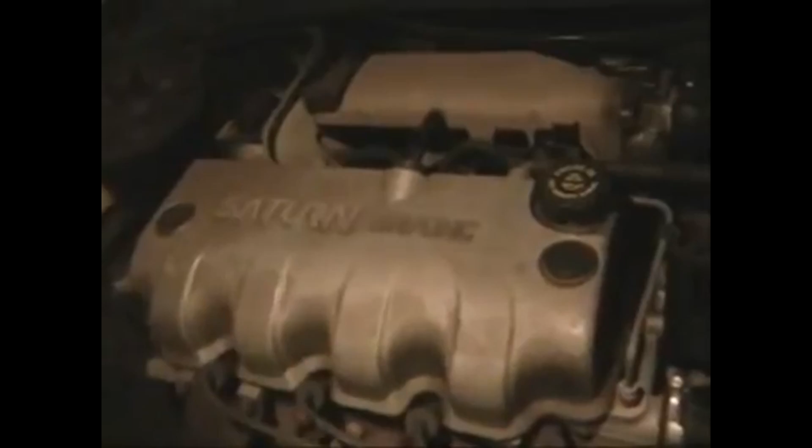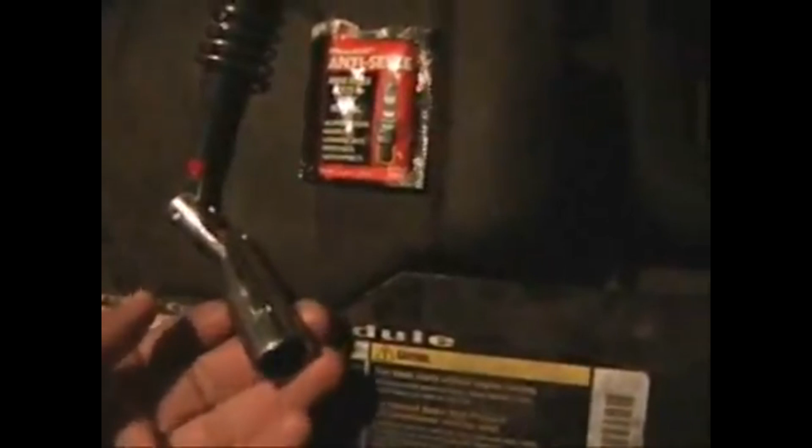Alright, today we're going to change the spark plugs on a 1998 Saturn single overhead cam. The tools you're going to need for this job are a spark plug wrench, which has the 5/8 size socket with the rubber boot inside to get hold of the spark plug as it's loosened, some anti-seize for the threads on the spark plugs, and your 4 spark plugs.

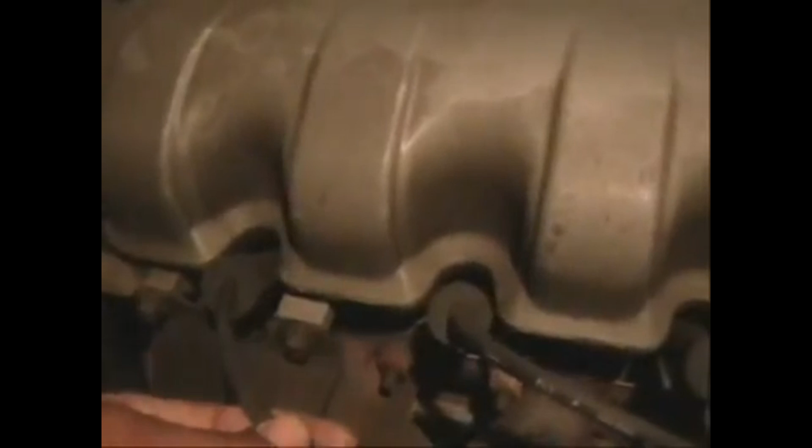Now all the spark plugs are located at the end of these boots right here: 1, 2, 3, 4. To take these boots off, just grab it right here at the end. Make sure you grab it right there, not right here, because if you pull on this part, it can rip out and damage the whole plug wire, and you have to replace that. I don't think you can buy those individually, you have to buy them as a set. So make sure you get it at the end and just turn and pull. It should come out really easy. Just move that aside.

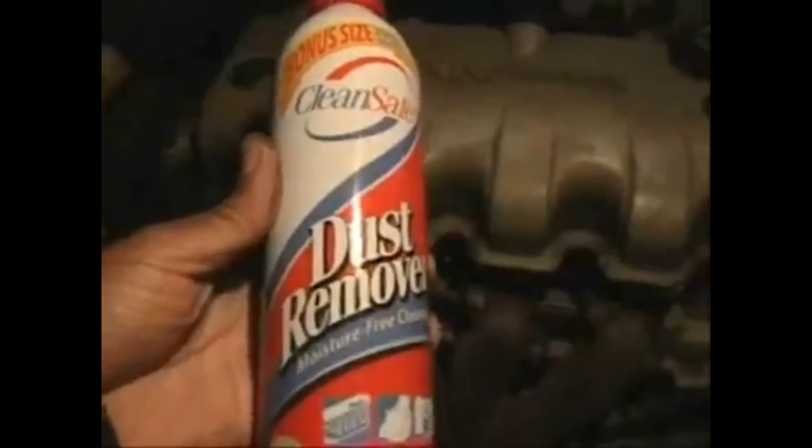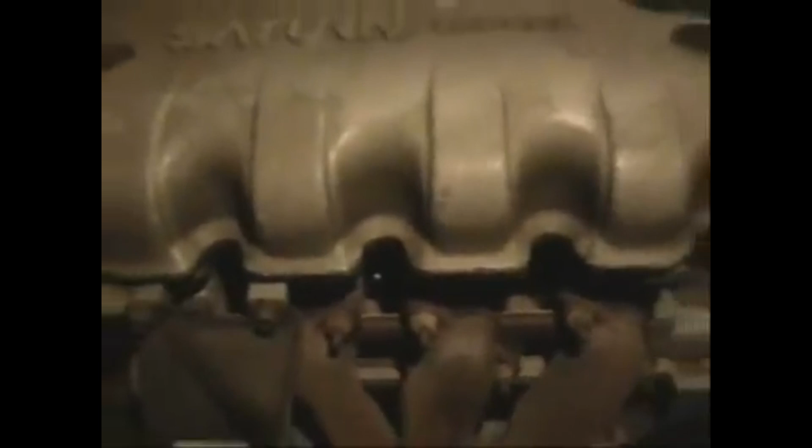Alright, now after you get the boots off, what I like to do is get some dust remover, any kind of compressed air, usually for computers and stuff. Sometimes, depending on how long the job is that you've taken the spark plugs out, there can be some debris down there. I'm sorry the lighting's so bad, but I checked these earlier before I bought the car, and there was some debris down there, so I use the compressed air before I take the spark plug out and shoot all the debris out, so when the spark plug is out, none of the debris gets into the engine and potentially causes some damage.

So that's what I'm going to do right now. Now before you do this, you may want to do one of 3 things: just close your eyes, or turn your head, or get some goggles on, because you don't want any of the debris to basically backfire and get any in your eye, if there's any in there in the first place.

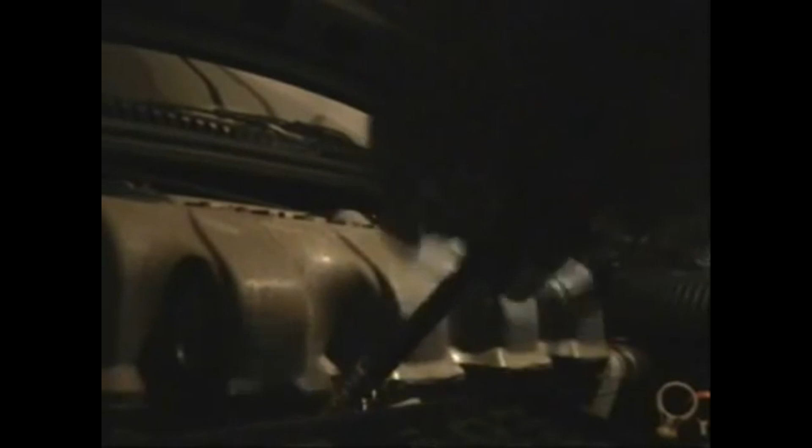That should be pretty good. Now that the dusting's all done, you just get the spark plug wrench and put it in there around the spark plug, and just twist away so it comes out. As I said earlier, the rubber boot should catch the spark plug, so you don't have to worry about it falling anywhere. Like this, see, it won't come out.

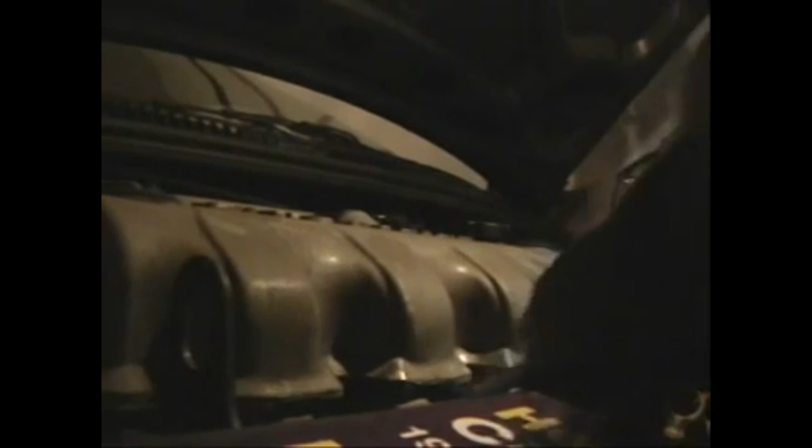And then you just pull them all out, and inspect them for any damage or signs of oil leaks, broken head gaskets, stuff like that, water, oil, white powder. We'll get into that later to show you what the difference is and what to look out for. But for now, we're just going to take these all out so we can replace them with the new ones.

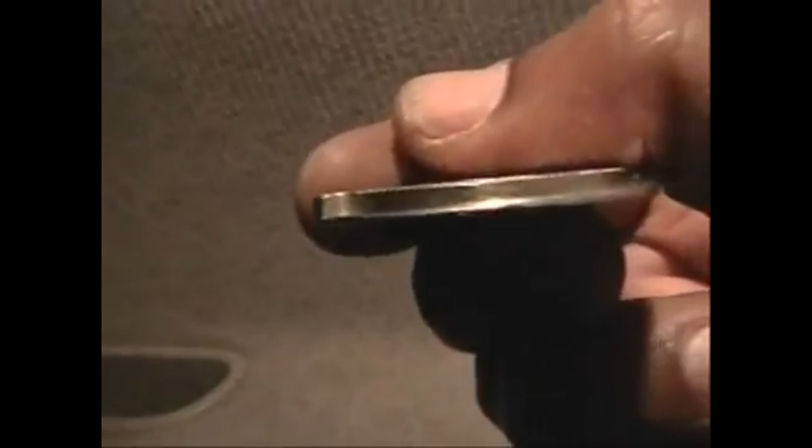Alright, now we have to gap our spark plugs. I came into the car and brought my light so we have better seeing ability. I got this gap tool, very basic gap tool from AutoZone, obviously, it says AutoZone on it. These numbers in here represent the space between the electrode and the tip of the spark plug. The bigger the number, the bigger the gap. As you can see here, the space right there, the metal piece gets bigger and bigger and bigger as I turn it.

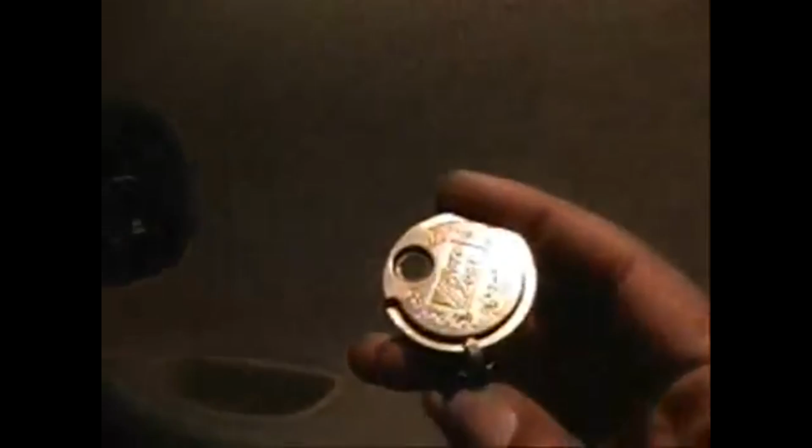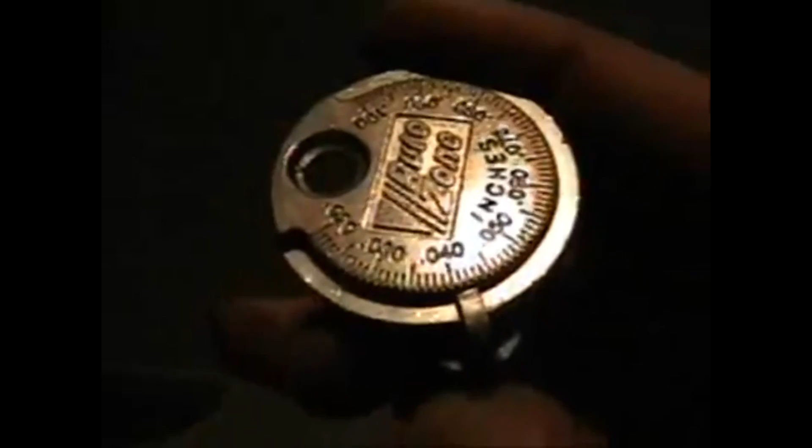All we got to do now is just put this little part right here, piece of metal, the brim, into the middle of that gap in the spark plug and see where we measure. Well, the guy at AutoZone said that these spark plugs are supposed to be at 0.040. As you can see, the spark plugs that I have are a little bit past that. From what I hear, it's okay to be a little bit past or a little under, but I like to be direct, I'm just OCD like that, I guess.

So basically, if it is too big, like how it is here, you just take the top of the electrode and you smash it down with, obviously, a harder object. Just put a little bit of weight on it, and that pushes that down closer, or take the tip of the spark plug and push it closer down to the electrode.

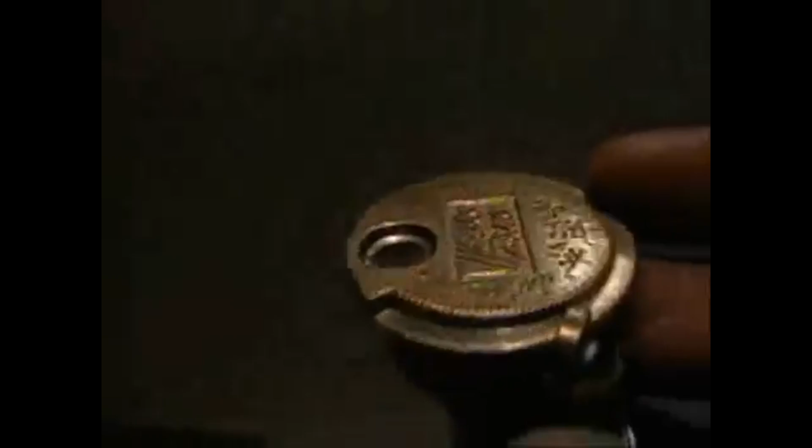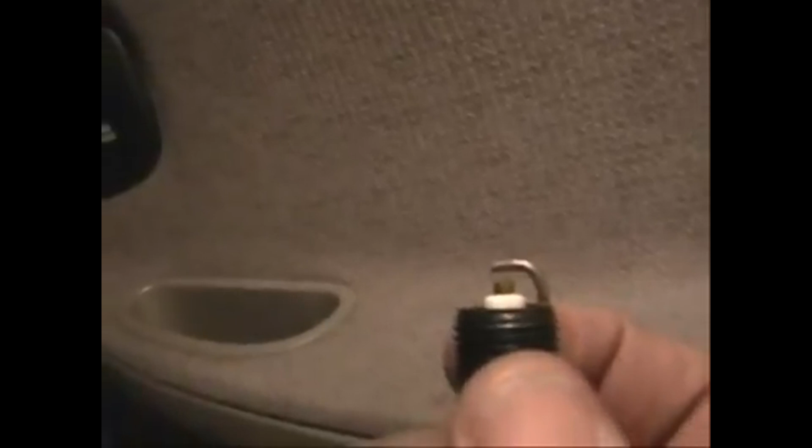Now, if it were smaller, let's say at 0.035, you would put the gapping tool in the middle of this. I just dropped it, but how it was before, and pull up, which will pull the end of the spark plug away from the electrode and create a bigger gap. Then from there you just keep measuring, plus or minus-ing, until you get to the designated gapping space for your engine.

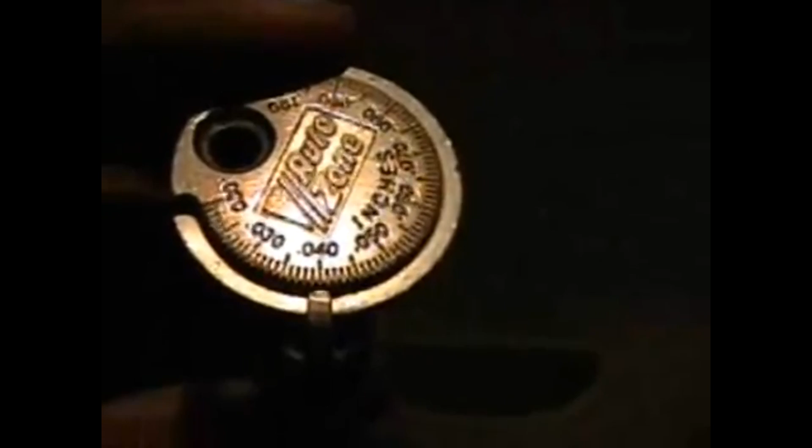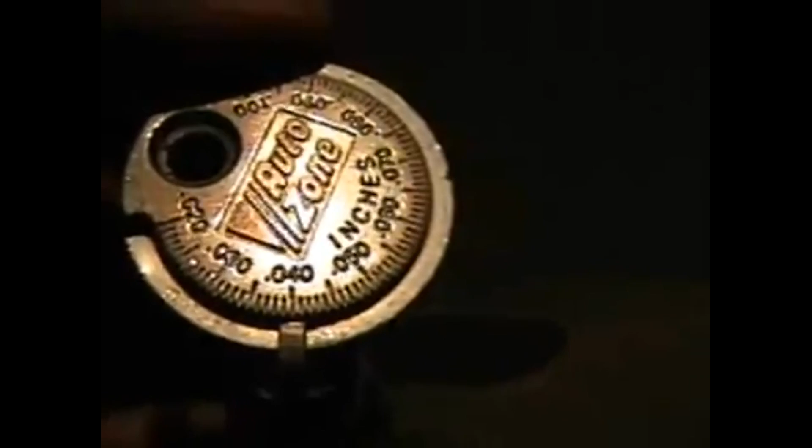Alright, so now I just re-gapped the spark plug. Now it's directly in the middle, right at 0.040, and I got to do that to the rest of the spark plugs. So from there, after I'm done with that, I'll show you how to put on the anti-seize onto the threading of the spark plug, and then we'll reinstall.

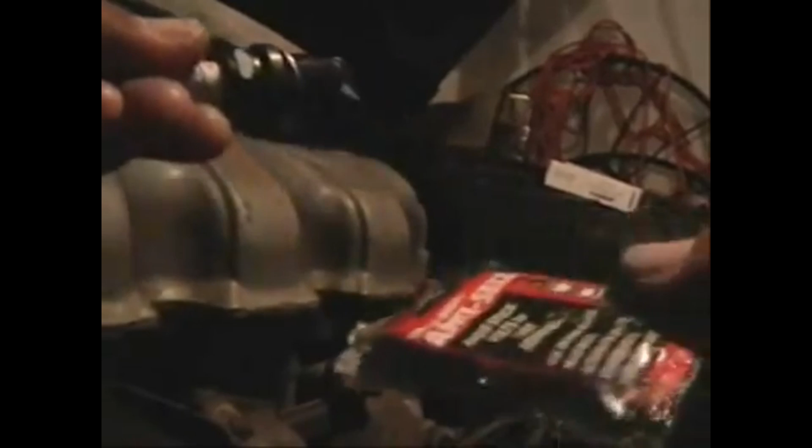Alright, now that we're done gapping, we take the spark plug and get the anti-seize. I like to snip it right at the edge right here, make a little snip, and squeeze until a little bit comes out.

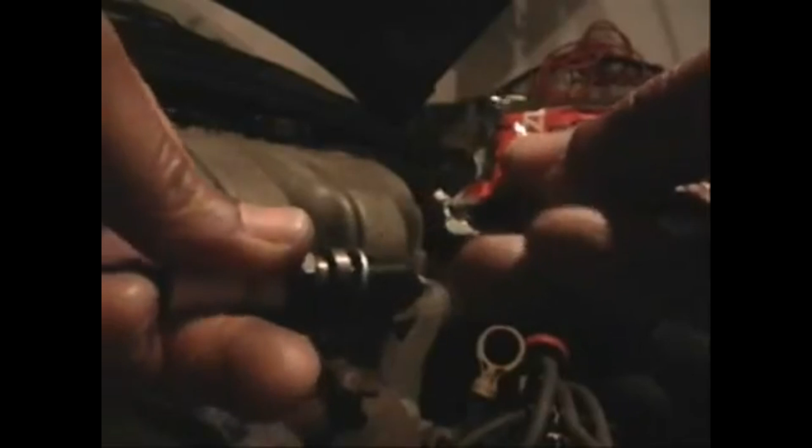There we go. And then just take it and wipe it onto the thread. Not too much though. Make sure it doesn't get on the electrode, and just turn it around and barely push out as you're turning it to where it gets all over the threading. This especially helps if you don't have gloves, so that way your hands don't get all gunked up. But that's basically it right there.

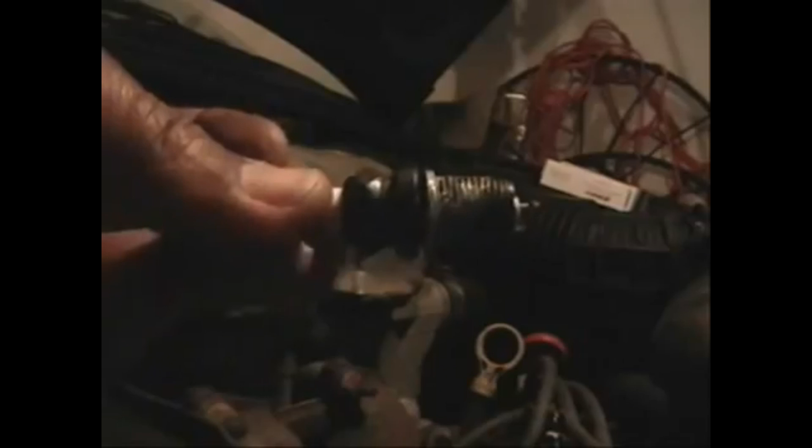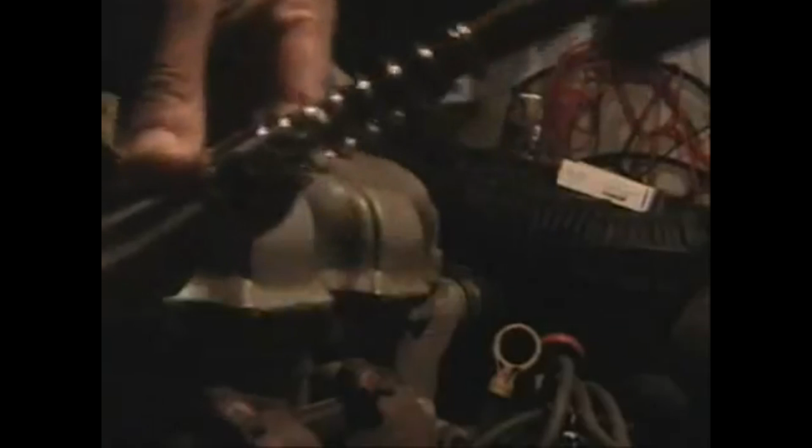And then just put the plug back into the wrench, and then install the new plug back in its place. Alright, now all the plugs are back in their places down there, 1, 2, 3, and 4. And now it's just time to put the plug wires back.

And to do that, you just make sure that the hole goes right on top of that spark plug. And you will know if you did it right, because you hear a little popping or snipping sound, if you want to say. I'll try to get it on camera so you can hear it. There you go. Little snip. And you just do that to all 4 of them. There you go. There we go. Snug as a bug.

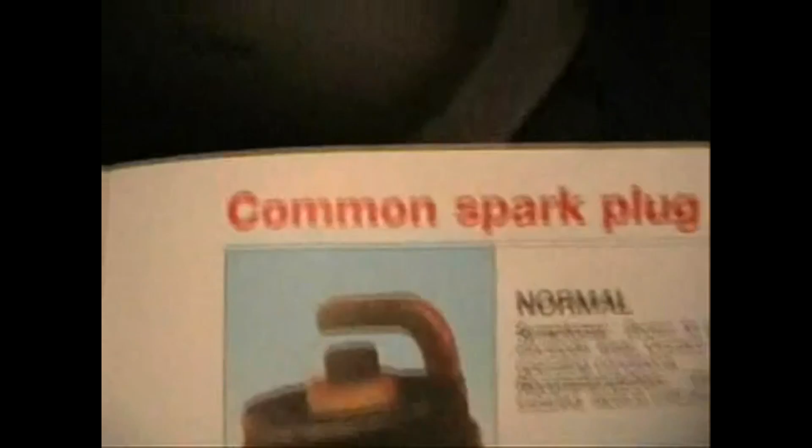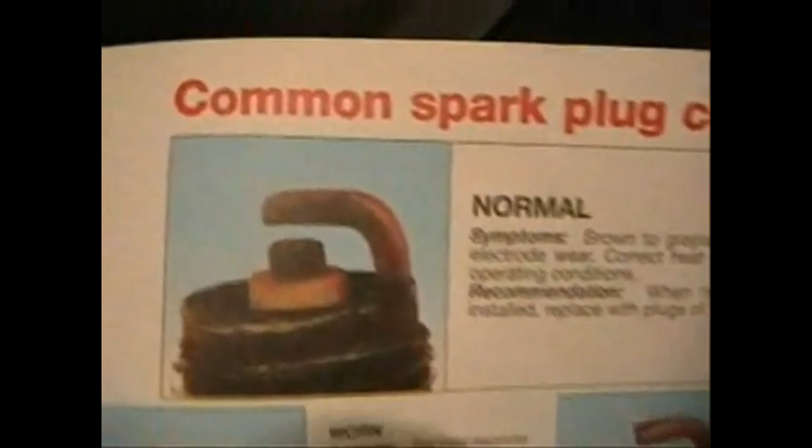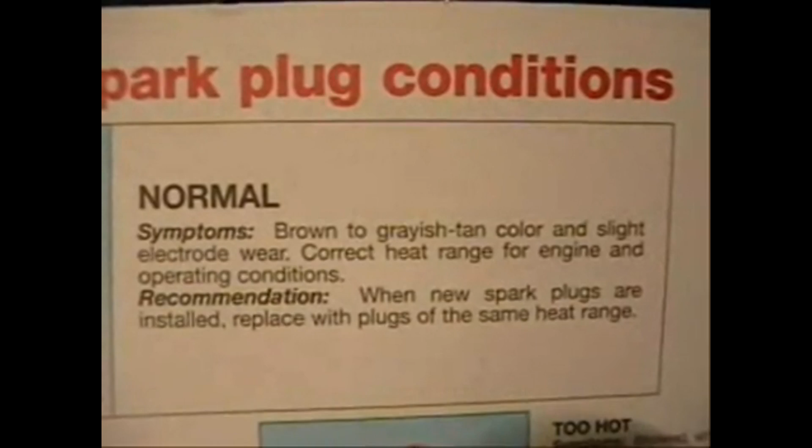Alright, in this part of the video, we're just going to check out the common spark plug conditions, basically what you can potentially expect when you pull out your spark plugs. Here's a picture of a normal wear and tear spark plug. Symptoms: brown to grayish tan color and slight electrode wear. Correct heat range for engine and operating conditions. Recommendations: when new spark plugs are installed, replace with plugs of the same heat range.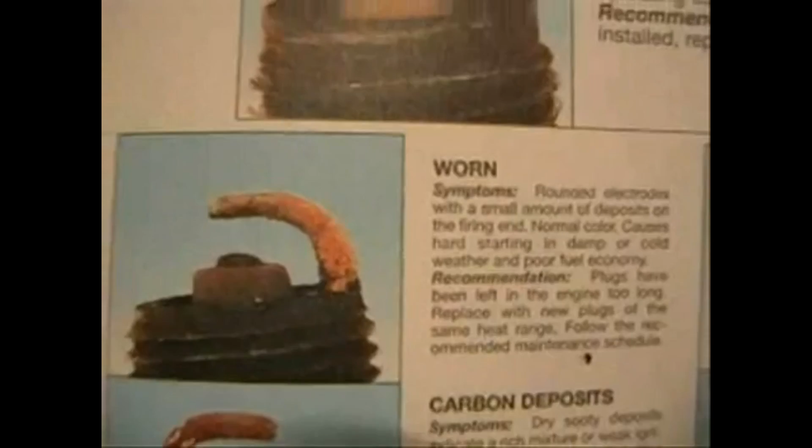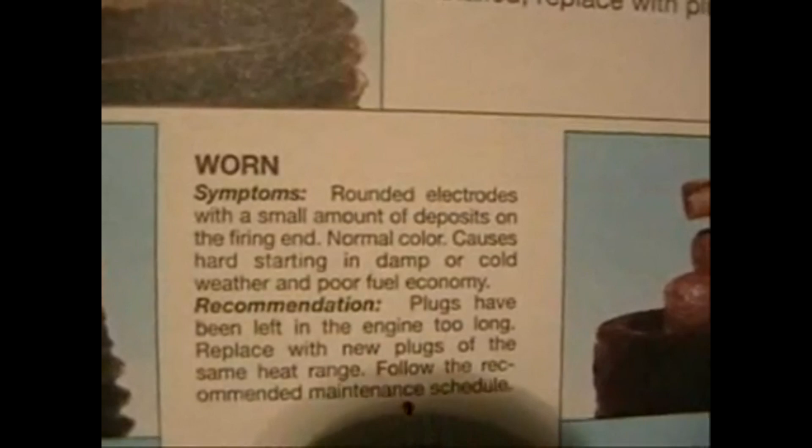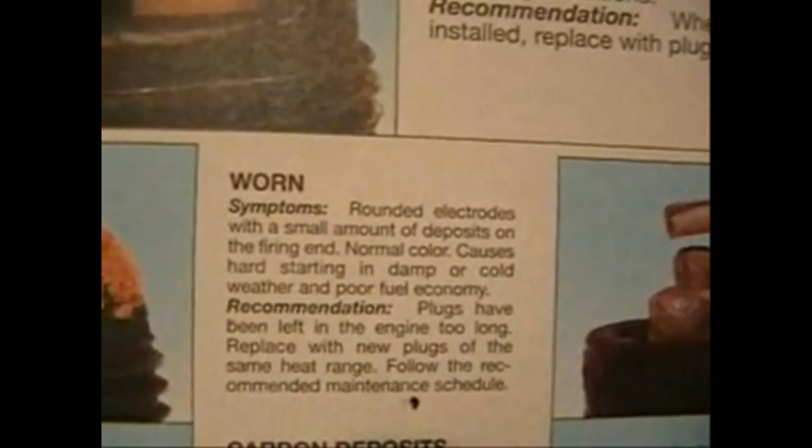Worn, there's the picture. Symptoms: rounded electrodes with a small amount of deposits on the firing end. Normal color. Causes hard starting in damp or cold weather and poor fuel economy. Recommendations: plugs have been left in the engine too long, replace with new plugs of the same heat range. Follow the recommended maintenance schedule.

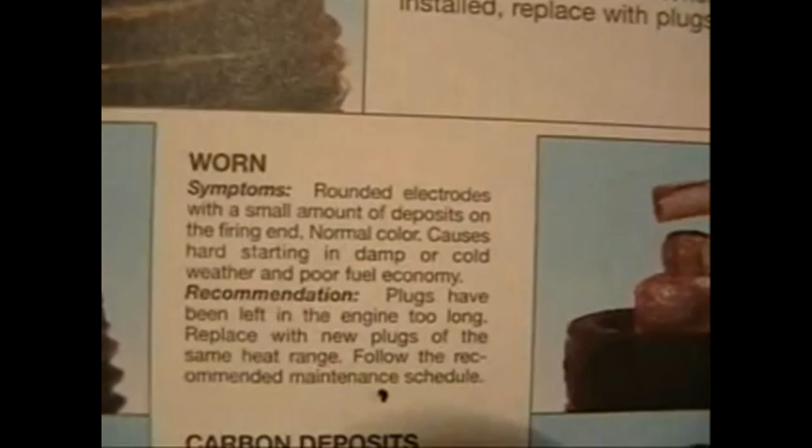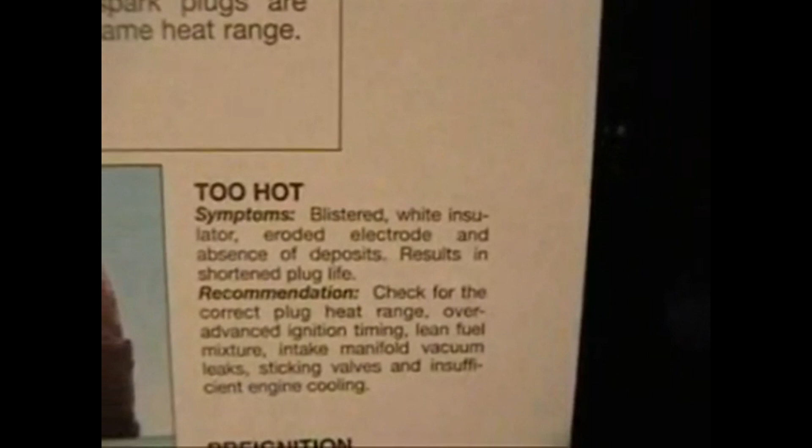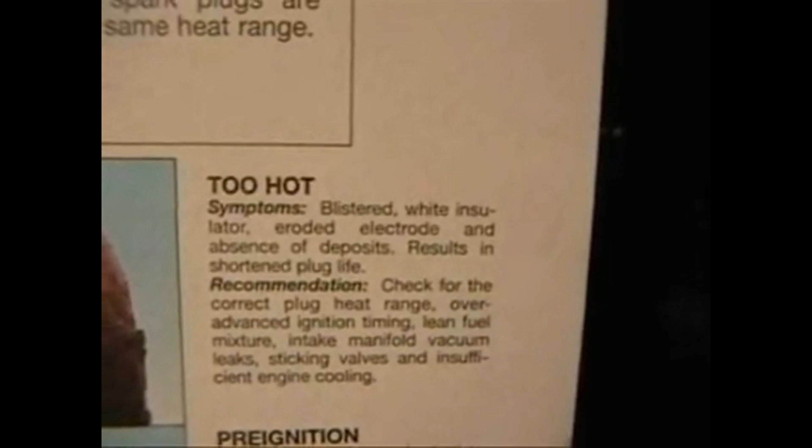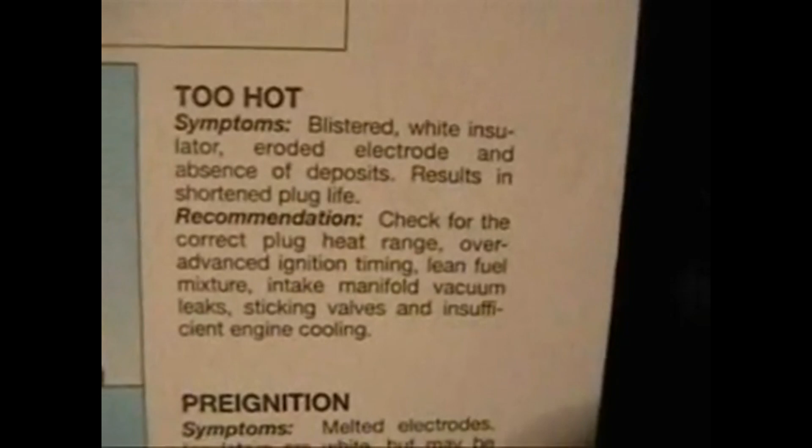Too hot of a plug. There's the picture. Symptoms: blistered white insulator, eroded electrodes, and absence of deposits results in shortened plug life. Recommendation: check for the correct plug heat range, over advanced ignition timing, lean fuel mixture, intake manifold vacuum leaks, sticking valves, and insufficient engine cooling.

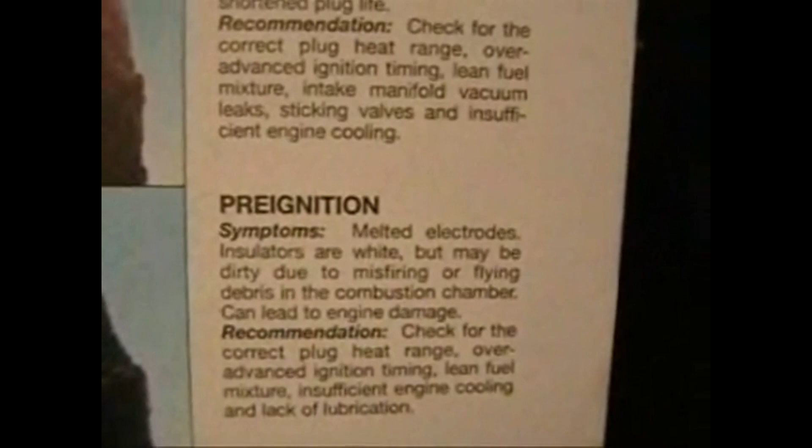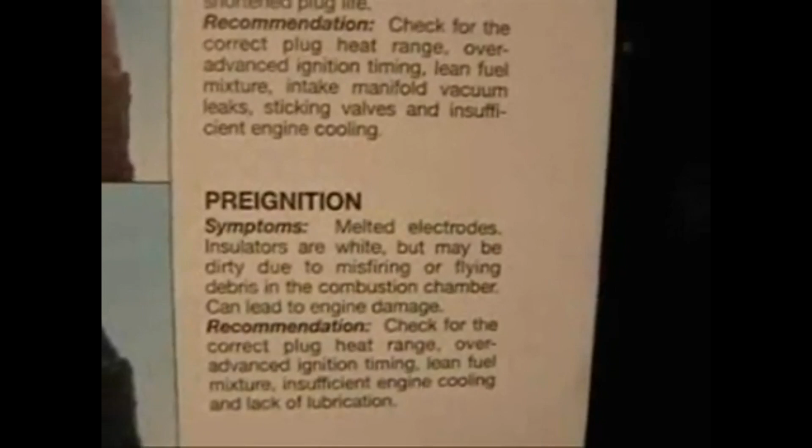Below that one, that's the picture. Pre-ignition. Melted electrodes, insulators are white, but may be dirty due to misfiring or flying debris in the combustion chamber. Can lead to engine damage. Recommendation: check for the correct plug heat range, over advanced ignition timing, lean fuel mixture, insufficient engine cooling, and lack of lubrication.

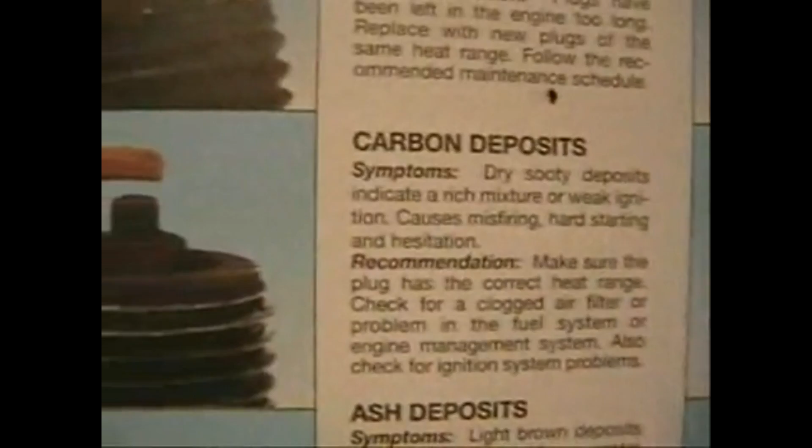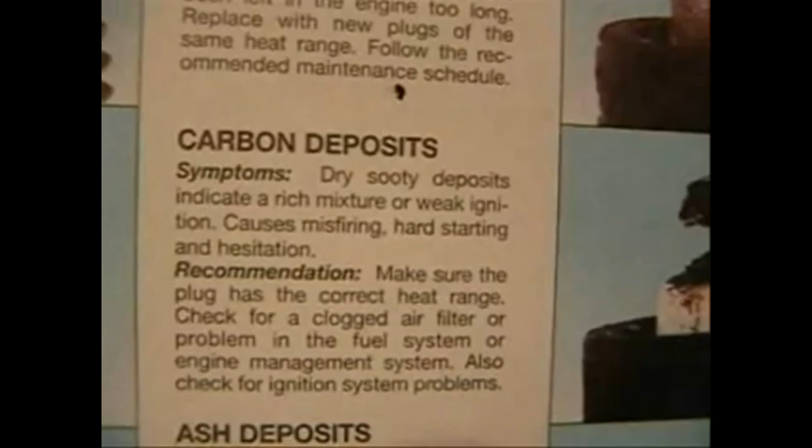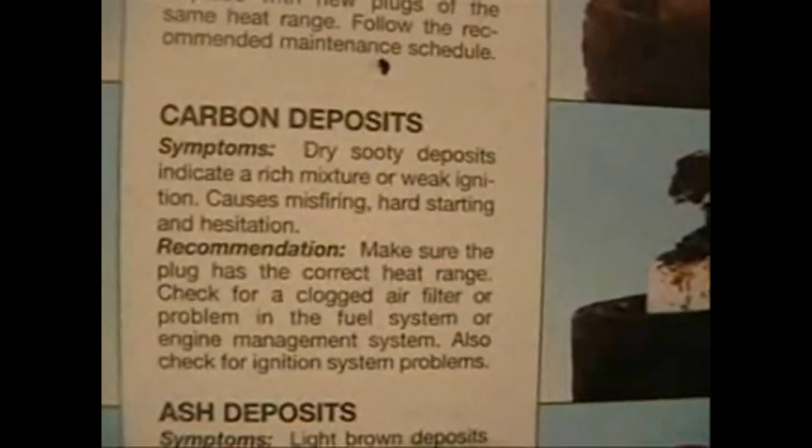Across from that is carbon deposits. That's the picture. Symptoms: dry sooty deposits indicate a rich mixture or weak ignition, causes misfiring, hard starting, and hesitation. Recommendation: make sure the plug has the correct heat range, check for a clogged air filter or problem in the fuel system or engine management system. Also check for ignition system problems.

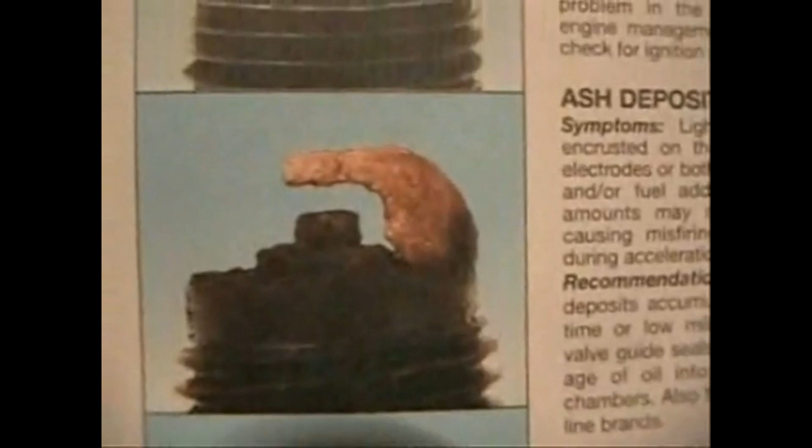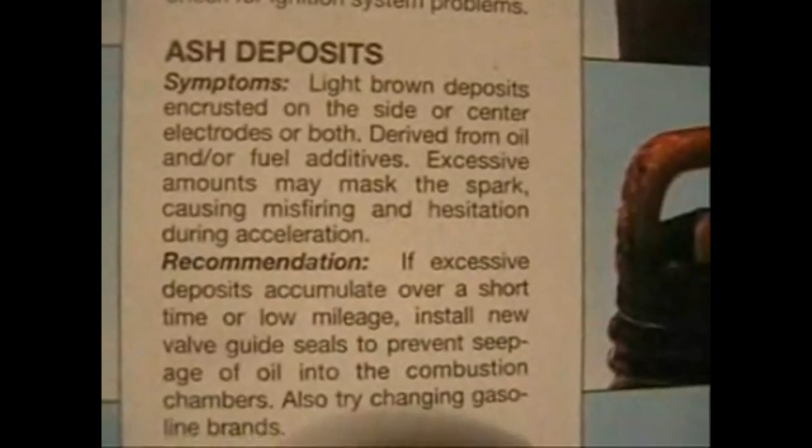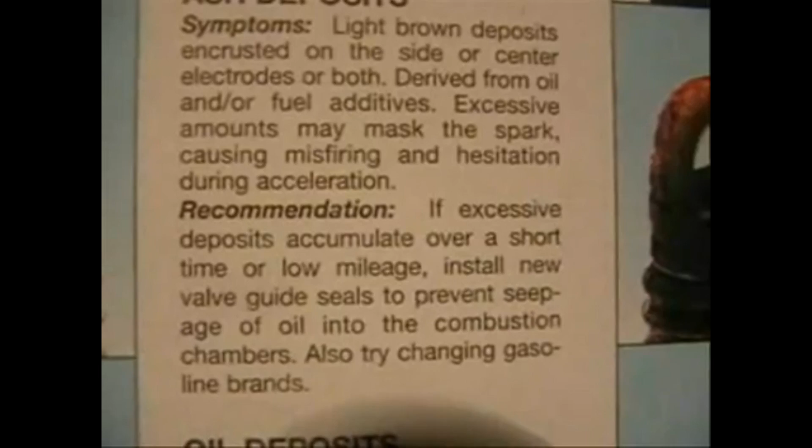Ash deposits. That's the picture. Light brown deposits encrusted on the side or center electrode, or both, derived from oil and/or fuel additives. Excessive amounts may mask the spark, causing misfiring and hesitation during acceleration. Recommendation: if excessive deposits accumulate over a short time or low mileage, install new valve guide seals to prevent seepage of oil into the combustion chamber. Also, try changing gasoline brands.

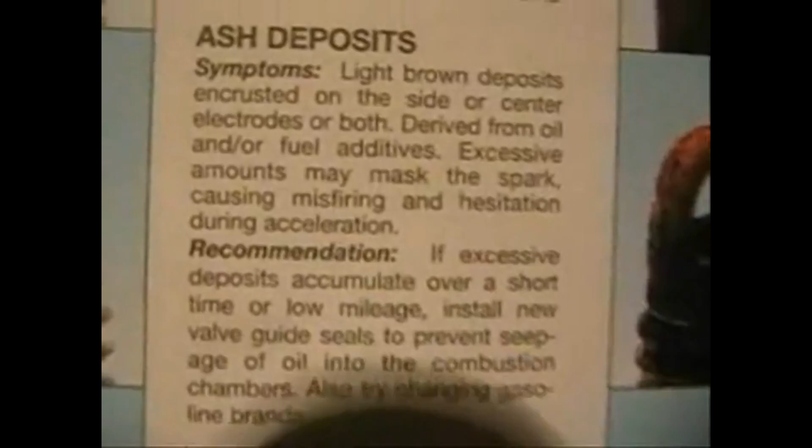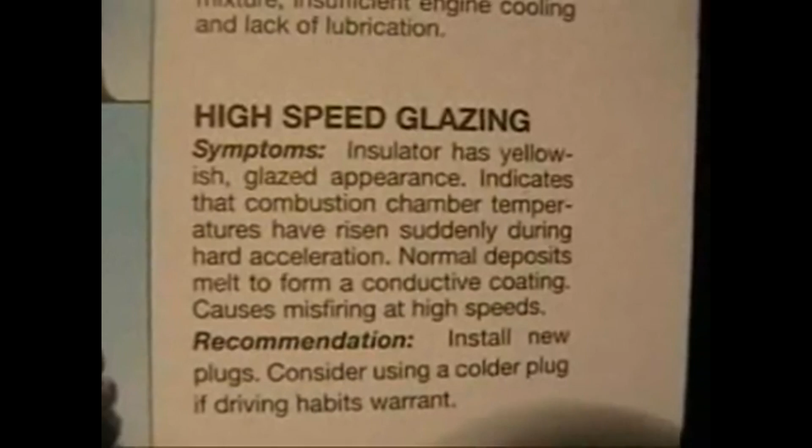High-speed glazing. Picture. Symptoms: insulator has yellowish glazed appearance. Indicates that combustion chamber temperatures have risen suddenly during hard acceleration. Normal deposits melt to form a conductive coating. Causes misfiring at high speeds. Recommendation: install new plugs. Consider using a colder plug if driving habits warrant.

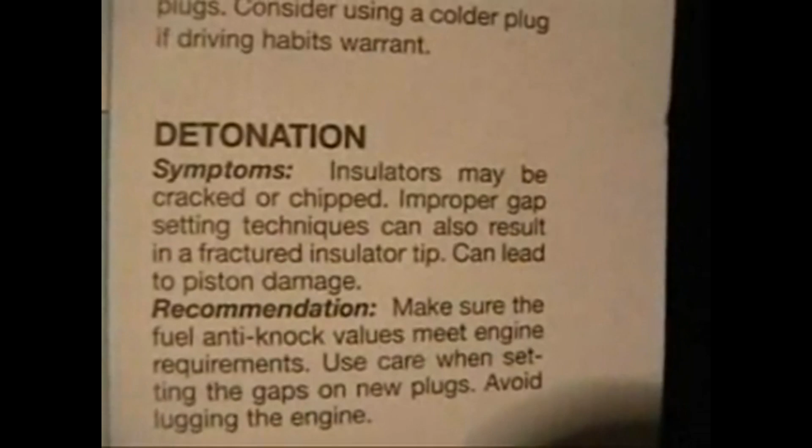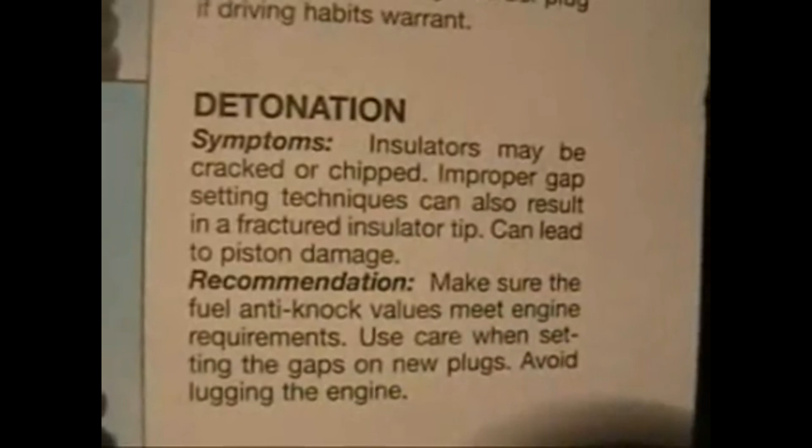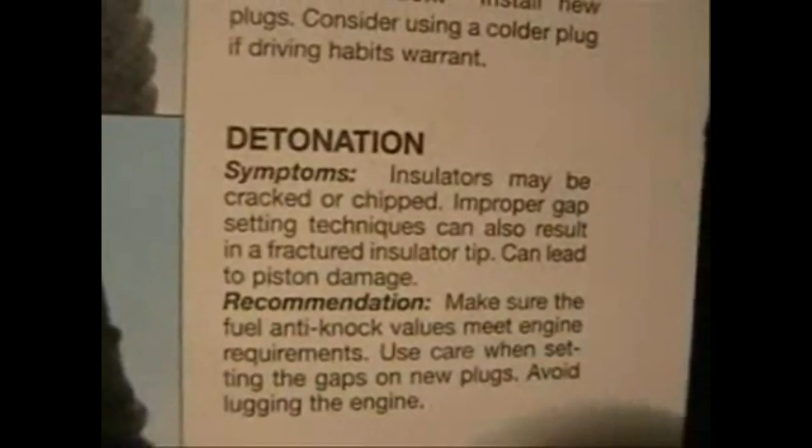Detonation. Insulators may be cracked or chipped. Improper gap setting techniques can also result in a fracture. A fractured insulator tip can lead to piston damage. Recommendation: make sure the fuel anti-knock values meet engine requirements. Use care when setting the gaps on new plugs. Avoid lugging the engine.

Picture. Oil deposits. Oily coating caused by poor oil control. Oil is leaking past worn valve guides or piston rings into the combustion chamber. Causes hard starting, misfiring, and hesitation. Recommendation: correct the mechanical condition with necessary repair and install new plugs.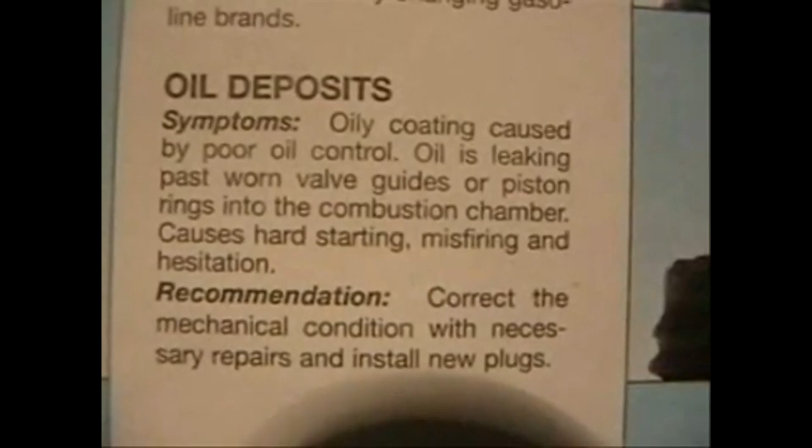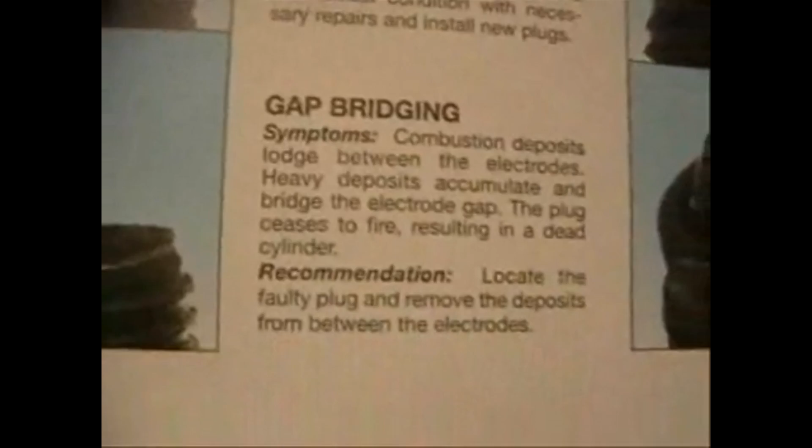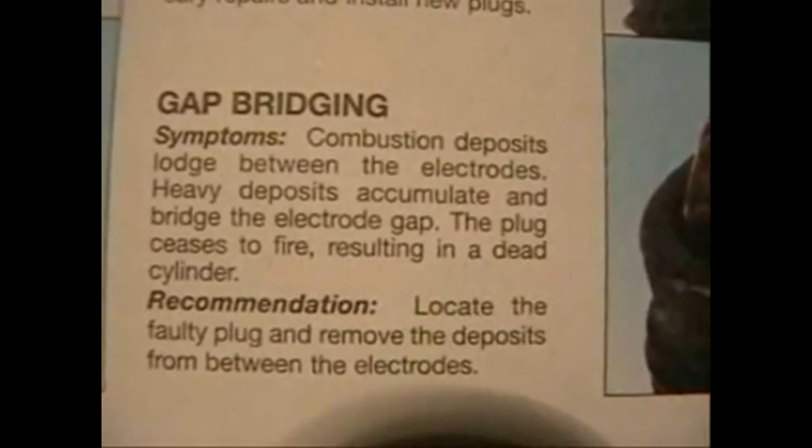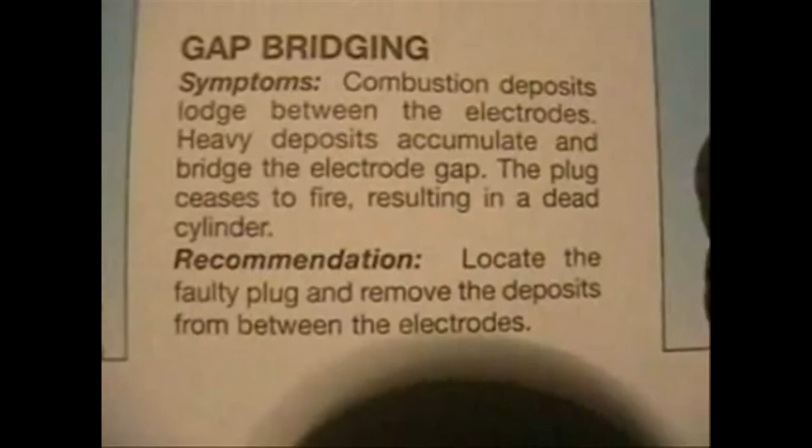Picture. Gap bridging. Symptoms: combustion deposits lodge between the electrodes. Heavy deposits accumulate and bridge the electrode gap. The plug ceases to fire, resulting in a dead cylinder. Recommendation: locate the faulty plug and remove the deposits from between the electrodes.

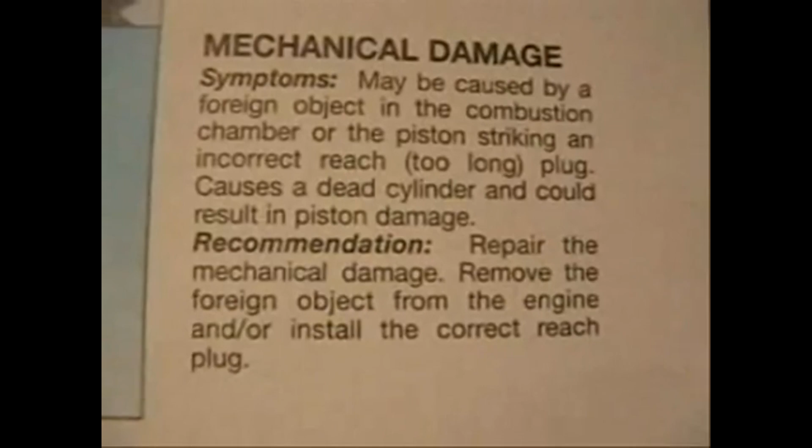Picture. Mechanical damage may be caused by a foreign object in the combustion chamber or a piston striking an incorrect reach, too long, plug. Causes a dead cylinder and could result in piston damage. Recommendation: repair the mechanical damage, remove the foreign object from the engine, and/or install the correct reach plug.